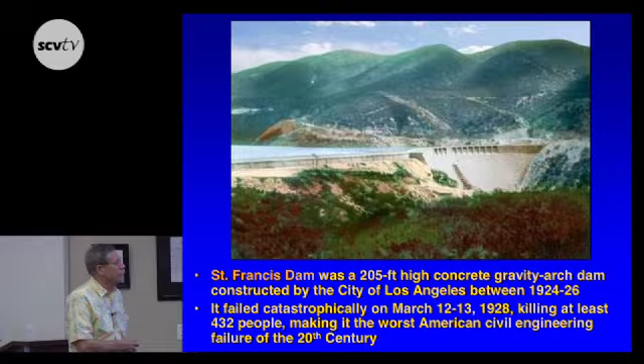The guy that built it, who headed up the water department for many, many years, was Big Bill Mulholland, who had left Northern Ireland at the tender age of 14 and made his way eventually to California in 1877. He took a job as a ditch tender, a Zanjero, for the Los Angeles Water Company, adjacent to the Los Angeles River, around 1879. He became the chief of that water company, succeeding Fred Eaton, when Fred Eaton became the city engineer in 1886. The company was bought out by the city in 1902.

And there were no records - the records were all in Mulholland's brain. So they got a board of public service commissioners, and they went down and sat with Mulholland for a couple of weeks, and he drew a map of the whole town and said, you got 5-inch lines here, 4-inch lines here, 2-inch lines there. He had it all in his memory.

He was the principal visionary of the first Los Angeles aqueduct, which was - I can't underscore what kind of precedent-setting project that was. It was the first time and only time in world history that a municipality built a water supply system ahead of its population. It almost always occurs the other way around - you wait till everybody's starving for water, then you have a referendum, then you go build something like the Croton Aqueduct the City of New York did in 1832. And they did it again in 1893, and again in 1917, and again in 1935. They just kept building the water infrastructure behind the burgeoning population. He solved all kinds of incredible problems to bring that project in on time and on budget - he was a born problem solver.

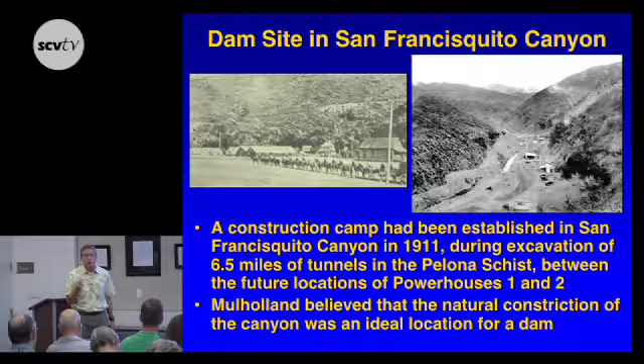Construction of the St. Francis Dam began in mid-1924. They built a cutoff wall, a little coffer dam, only 8 feet high because there's not much water in that channel in the middle of the summer.

That shows outlet number 1. You see outlet pipe number 1, which is two steps above the bottom step. That's going to figure real important later when we do the forensic analysis.

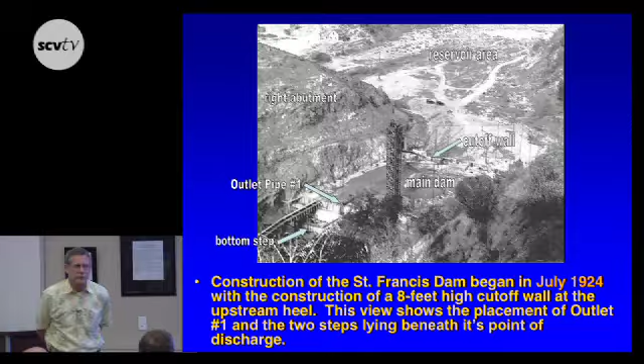When you do forensic analyses, what you go after are photographs. Photographs are the most reliable documentary source out there, until we got all the computer ways of altering photographs that we have now. But in the old days, photographs were better than people's memories. You never have too many photographs, especially aerial photographs.

And so they started placing concrete. In the 1920s, there was a lot of problem with the ways they placed mass concrete. You see here a bunch of billowy pillows. They weren't trying to set the concrete into casements so that you can have contraction joints like you see in Hoover Dam, where they were typically 50 by 50 casements, and you'd only pour 1 foot of concrete at a time. What they did here, they brought the concrete down in troughs and just pushed it out there all over the place, and you had little ponds that would form on top, and you'd get that real soupy laitance layer, which becomes a low strength layer. It's high water cement ratio, very, very porous, and not a good thing for dams.

But all the dams built up near Santa Barbara, up the coast, down here in Southern California, up through about 1930, have that problem. And a lot of them, most of them, have been retrofitted since they were built.

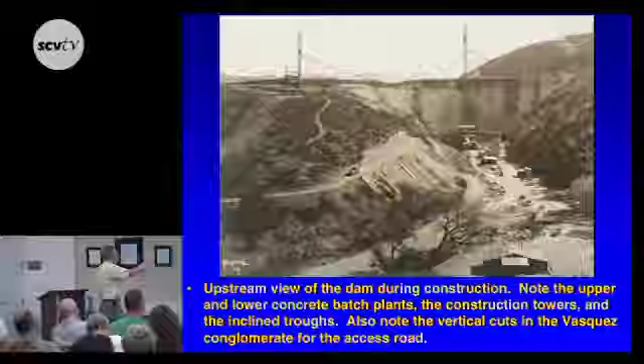They had minimal excavation of the abutments. The left abutment was in Pelona schist, right along foliation planes, which are weakness planes in the mica. You can see it dipping down about 35 degrees. They're only excavating about 7 to 15 feet into that material, which isn't very deep for a 205-foot high dam, but that's what they did on the left abutment. On the right abutment, they were in conglomerate, and they put a trench in there with a steam shovel.

This is the view looking upstream during construction. Those big towers are what they lifted the concrete from the batch plant at the bottom - right at the base of the dam was a concrete batch plant. They then would lift the concrete up, and then have it go down these troughs, just like the troughs you see on the back of ready mix trucks, except these things are 400 or 500 feet long, a couple hundred feet long.

And what happened is you get aggregate segregation when you put concrete down a trough. It's the same problem they had with Gibraltar Dam, up north of Santa Barbara, built in 1925. So they weren't doing concrete placement the same way 10 years later. That was something they didn't understand.

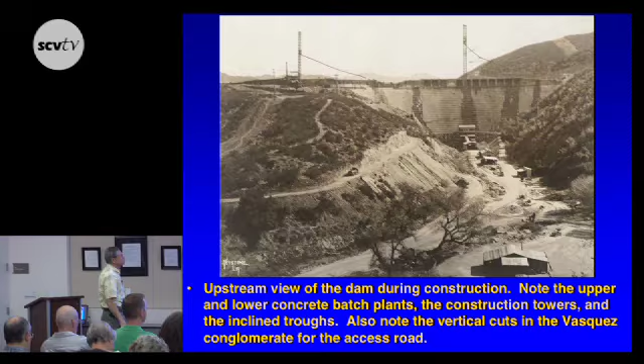What was good about this dam is that it had a step face, and each one of those steps had a different width depending on its elevation. The steps varied from 5.5 feet down at the lowest elevations of the dam, and they narrowed to as much as 1.45 feet up near the top of the dam. That figured very prominently in the forensic assessments they did later to tell where the blocks came from in the dam, up to a mile downstream.

It was completed in May 1926, so in 22 months, 130,000 cubic yards of concrete, with 11 little spillway panels you see up there with the sky just peeking through them. They were only 18 inches high. We've never, ever tried to do a stunt like that today - 18 inches high means any tree that comes down there is going to get caught in it. So that's not a lot of freeboard.

But that's what they did because they didn't expect this thing to ever be spilling, because it's an artificial dam - it's an aqueduct dam. It's designed to catch water from an aqueduct. It's way larger a dam than you'd ever build in San Francisquito Canyon for the amount of water you expect to collect there, because it's pretty dry in the Sierra Pelona.

It had 5 30-inch diameter outlet pipes with a maximum capacity of 1,184 cubic feet per second if you had a full reservoir right to the spillway slits. If all 5 of those outlets had been opened at noon on Monday, March 12th, when they were out there inspecting the dam, Mulholland and his chief assistant Harvey Van Norman, they would have dropped the reservoir by only 1 2/3 feet in the next 12 hours.

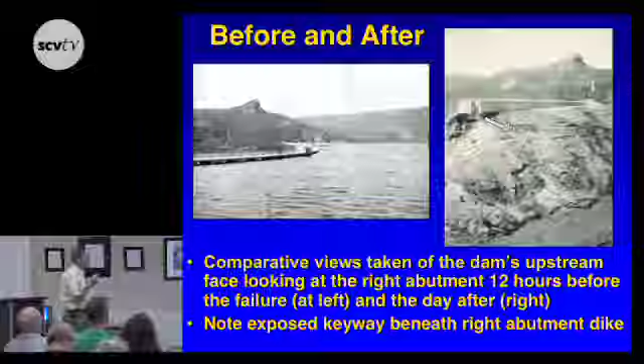Play it safe, drain it fast as you can. The reservoir was brought up to spillway level for the first time, almost 2 years into its operation, on Wednesday, March 7th, 1928. All the city reservoirs were full by the following Sunday, March 11th.

And that's real important in the story, very important. So all the city's reservoirs were topped out, they could take no more water, so they began dumping water on the Drinkwater Canyon bypass. Well, the first time they'd ever used it was the day the dam failed. So all this water coming down San Francisquito Creek that hadn't been coming down the creek the day of the failure - a lot of local residents recall that and say the dam is leaking. No, the aqueduct was dumping because they couldn't store any more water, and it was cool and clammy with a low ceiling, so people weren't using a lot of water.

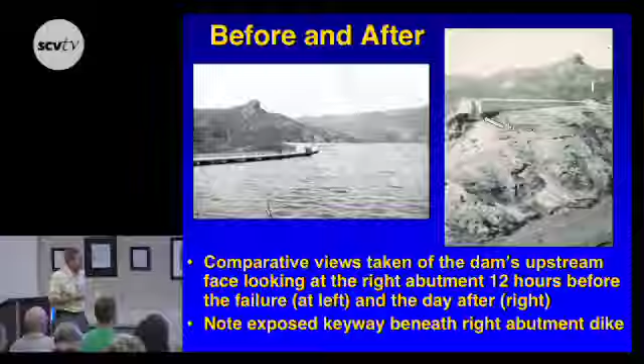Dam keeper Tony Harnischweger called Mulholland that morning to report dirty water coming from the right abutment area. There's always water leaking out of dams, and there's always water leaking on the abutments of dams and underneath dams. That morning they had about 2 cubic feet per second spillage coming over the spillway panels, darkening the downstream face.

That wasn't what Harnischweger called them about. Harnischweger's calling about water coming out of the upper end over in the dike section and coming down, and it's muddy. And when a dam engineer gets told he has muddy water, that means you could have hydraulic piping, like underneath a levee. And you get very excited. You don't want to have muddy water. Clear water is fine, muddy water, bad juju. Don't want that. So Mulholland races out there. He doesn't drive - he has a chauffeur-driven limousine that takes him and Harvey Van Norman out there.

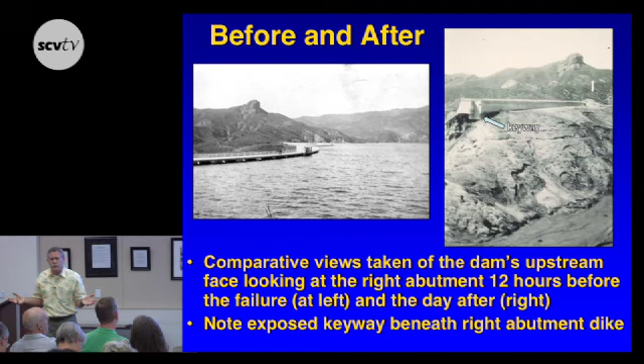When they get out there - this is a real unusual case. You can't find another dam failure where the chief engineer and the assistant chief engineer are there looking at it 12 hours before the failure, and what do they do? They bless it. It's like, everything's fine, see you later alligator. Well, that's what they did.

They came up there and looked at it, and he said, I don't see any problem, we got high water. And he found out that the leak - what happened is the leak was coming through as clear water, and then it came down a construction road they were just putting in, and it picked up the dirt when it went over the uncompacted fill on the shoulder of the road, and that's how it got muddy. So that was a reasonable conclusion to draw. I can't fault him on that one. I probably would have said the same thing.

It went out in the middle of the night. And the first 62 victims were employees and their families of the Department of Water and Power, who lived just 1 3/8 miles downstream. Lots and lots of dead children.

I'm very zealous about flood safety, and a lot of people call me up. I talk to the media all the time, and they say, why are you so zealous? So-and-so over at this university is not nearly as concerned as you are. And I said, the difference between him and me is I pick the dead babies out of the trees. You do that, you have PTSD. You don't get that out of your...

There's a little boy about the same age as my little boy, never identified. Looks like a Latino boy down in Oxnard. Innocent victims of flooding - that's what we should never forget. You can't do things too safe when there are things that can kill children.

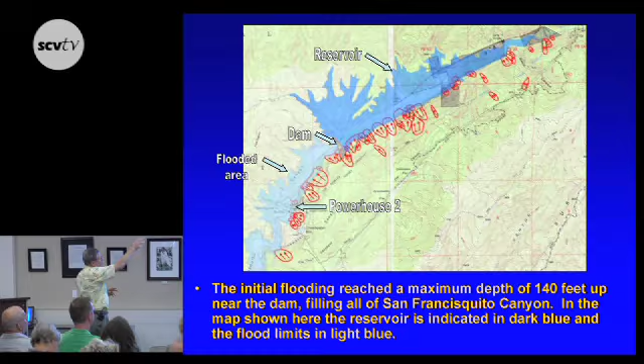The dark blue is the lake before the flood. The light blue is the inundated area going downstream. You can see all the buildings right there - that was the houses across from Powerhouse 2 that all got taken out. Only 3 survivors there: Lillian Curtis Eilers and her son Danny, and Ray Rising, out of the 70-some people that were there.

So there are 64 victims at Powerhouse 2, and you can see the penstocks come down where Powerhouse 2 had been. The aqueduct was completed in 1913. Powerhouse 2 was completed in 1920.

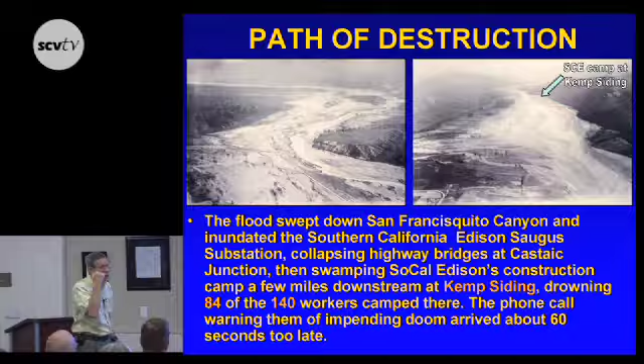It then came down and met the Santa Clara River, spread considerably, took out all of the Castaic area, killed a lot of families there, and then went down to Kemp Siding, killing 84 of the 140 Southern Cal Edison workers in a workman's camp. That was so close—they were calling them on the phone, and the night watchman answered, but before they could tell them to get everybody out, the phone went dead.

They were just seconds too late to save the people there. It finally reached the Pacific Ocean at Montalvo around 5:30 a.m. By that time, it's only moving 5 miles an hour, but it's 2 miles wide.

You wouldn't think that would be capable of knocking bridges down, but it knocked down the Coast Highway and the Southern Pacific Main Line, both taken out right at the coast. That's a lot of water to suddenly put in, and what happens is you get back eddy scour on the downstream side of the pilings, of the bents.

The Santa Clara River is just pure sand, so if you put a lot of load on it, it's going to eat down. If you have 5 feet going up, you're going to have about 15 feet of scour going down. That was the problem—it was a scour problem.

It's a 52-mile path when you smooth it, 54 miles to the ocean—2 miles shorter because the flood is cutting off the corners.

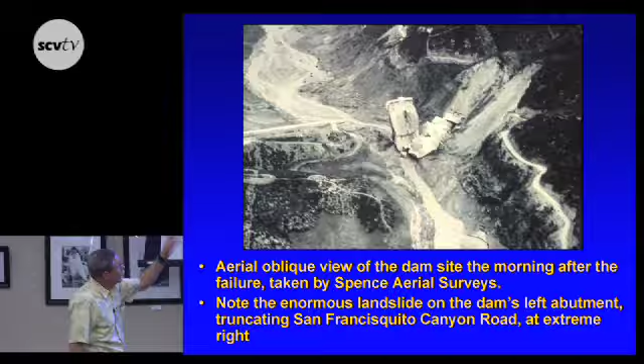The left abutment had a very large landslide, and that's the surprising thing. You see it truncated the road, taking out about a quarter mile of the San Francisquito Canyon Road. Mulholland and his assistant Harvey Van Norman had a hard time even getting there because the road was taken out by other landslides.

When you drain a reservoir very, very rapidly, you get something called a rapid drawdown condition. This is what kills levees. If you let the water go down real fast, you get an imbalance because the banks are saturated, so the banks just slump into the reservoir.

So they had to hike in, and the chauffeur had to dig steps for Mulholland, who's an old man, to get in there. He's 73 years old when this happens.

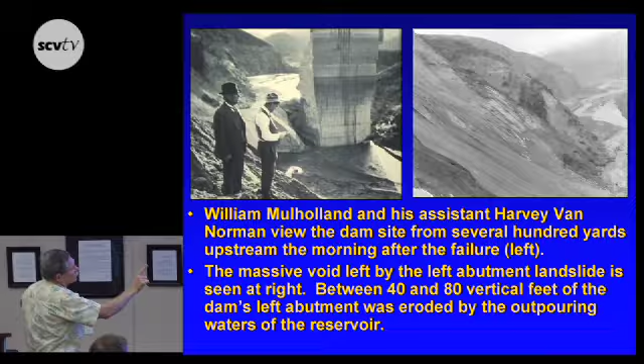So between 40 and 80 vertical feet of the left abutment was eroded. When you look over there and see where the landslide is on the right, the dam was built 40 to 80 feet above that surface. It was an enormous amount of material eroded out of there.

Governor Young appointed a 6-man panel to investigate the failure, including 2 geologists. They made a single visit to the site on Tuesday, March 20th, and depended entirely on information collected by others. We can see the guy making a plane table survey over there, which was the survey given to those investigators, and the geologists were very much impressed with this fault.

You see right there, it looks like an interstate highway, that white line—the white contact with the gray is the fault. Here it is in black and white, orange over silver. They saw that fault and thought, who would be dumb enough to build a dam on a fault? That's what all my geology classes said at Cal Poly—they took us out there and said, this is what happens with a dumb engineer who doesn't get geology and builds a dam on a fault.

Now, before you think Bill Mulholland's too dumb, he's the first civil engineer in the United States to recognize faults and the risk they pose to water supply infrastructure. He wrote a whole paper about it in the Bulletin of the Seismological Society of America in 1918, and gave a keynote presentation at their annual meeting in Los Angeles that year.

He tells about intercepting the San Andreas Fault 400 feet below Lake Elizabeth when putting in the aqueduct. He maps the zone, about 300 feet wide. That's why he wants to build a dam and reservoir south of the fault to hold a one-year supply of water, because if that fault moves again like it did in the January 1857 Fort Tejon earthquake, it's going to take a year to fix that tunnel. He was 75 years ahead of his time on that one.

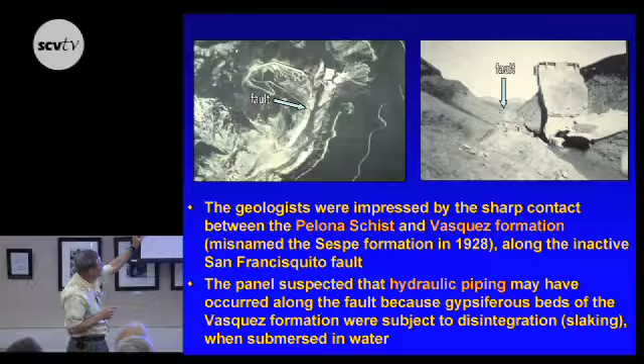Those are never good for hydraulic piping—materials subject to hydraulic piping. So they took pieces of this conglomerate out, went into the coroner's inquest, put the conglomerate into beaker water, and it just spontaneously disintegrated. They said, 'Would you build a dam on that?' Well, the thing is, the dam weighs a lot. You put the dam on the material—it's not like the material can just disappear and come out of there.

It has all to do with something we call restraint in solid mechanics. If it's restrained, the bad stuff can't hurt you. It's only when it's free to move somewhere that it can hurt you. So that's what they concluded at the time, and these guys got their report out first, so that's the report that's in all the textbooks to this day. That's how the St. Francis Dam failed.

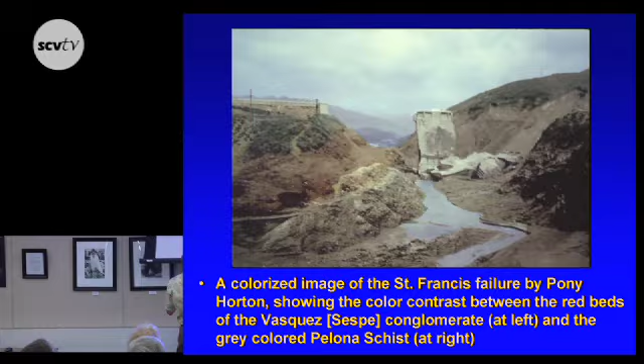This is a colorized image that actually shows the fault. You can see that silvery material is the Pelona schist. The orange material is the Vasquez conglomerate.

Now, when you're on any kind of forensic panel, and I do lots of these still right now—I have the Oso landslide in Washington I'm doing right now. It killed 43 people last year. I'm chairing that commission. You are always going to be taken hostage by things that are graphic. And that's good, you've got to take them in, but you can't let them over-prejudice you about what's going on.

Going out to the site one time, not making any independent measurements—these are all things you should not be doing in a forensic investigation. And you want to get people of different backgrounds, different experiences, as I'm going to talk about later. It's very important.

All right, so here's the map that they were given, that the State Commission was given. Horace Wildy, who was a Division of Highways surveyor, put it together, and he shows the dam, and he shows block 16 way downstream of 11, 12, 13, 14, and 15. Block 16 came out of the right abutment side, right above the fault. So it's the block right up there near the fault.

So that's part of why, again, that was circumstantial evidence. The panel said, well, that block went a half mile downstream, the other large blocks only went a quarter mile downstream, so it must have failed there first. They didn't have anybody on the panel, and they didn't have the expertise in those days with supercritical flow. Concepts of channel hydraulics hadn't been invented yet.

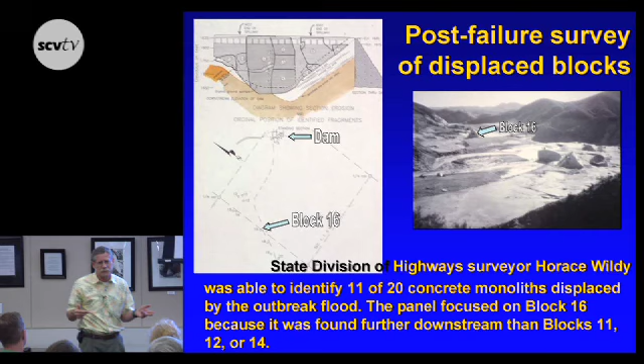So they were way, way off on the peak flow estimate. They estimated 400,000 CFS. When we did the reanalysis in the early '90s, we got 1.7 million. So you can see that's the kind of difference—we were off by a lot.

Now, the other thing was a missing section. In the original state report, the yellow area was the area they hadn't identified any blocks coming from. The white area underneath the left abutment is all the material eroded away by the outpouring floodwaters, and all of that is on the left abutment, not the right. It's like, do we have eyes? They did lose material on the right abutment too, but nowhere near as much as was taken out on the left abutment—a big, big hole under the dam taken out on the left abutment. So that was the missing section.

They fixed the blame and issued their report 5 days later. The team that gets their report out first is the team that makes it into all the newspapers. And after that, the story gets stale.

Because that's what happened, that's the book that was put out, that's the story everybody tells.

One of the shortcomings of Wildy's plane table map was that it did not include the relative elevations of these dam blocks. Blocks 12 and 14 from the base of the left abutment are actually located 26 feet higher than block 16 way down there. Block 11 may have helped form a dam with blocks 12 and 13 that deflected subsequent flows off to the left, where block 16 was found further downstream.

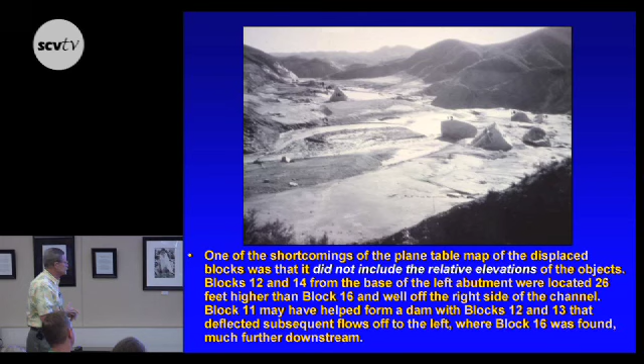If we go back, Charles Outland was a native of Santa Paula. He was a senior in high school, Santa Paula High School, when this flood came through his town and devastated it. He became an investigative journalist of sorts, a rancher by trade, and he did some great forensic work. So we don't have to go to college to get knowledge to do great forensics.

What we got to do is just be careful and not be over-prejudiced. You know, collect all the information and look at it. And he looked at this construction photograph and said...

There's the lower outlet pipe number 1, and I count 1, 2 steps below that, and that's all. He points this out in his book. First edition of his book comes out in 1963, second edition 1973.

When you look at that, what that tells you is this is the drawing that they gave to the state commission and said, that's the cross-section of the dam. Near as I can tell, all the part in yellow was never built. That was phony, that was not an accurate representation.

You look at all the photographs, Outland's right. And that toe he shows, which is about 10 feet wide, I put in there in red. So if you look at where the outlet pipe was, that's what they actually built.

When I got into the Bureau of Waterworks and Supply design files, there's the original design for the dam, showing a chopped toe very clearly. It did not flare out like it should have. It was a chopped toe, and they even put a shear key in.

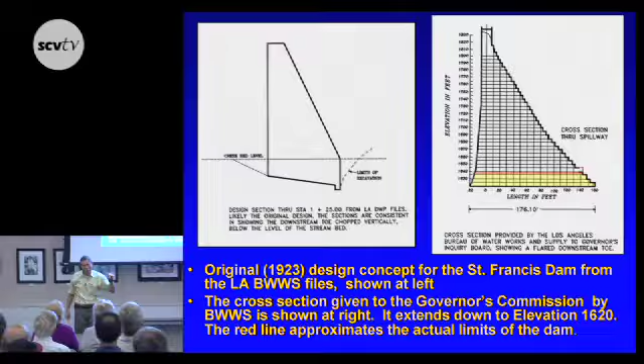The worst possible place you could put a shear key in is the downstream toe. You want that shear key at the upstream toe, not at the downstream toe. But that's how they showed it.

Now, also when you look at all the photographs, you see they didn't have the batter. There's a shift in batter right there, but they didn't have the bigger shifting batter down here to keep the toe out of tension. So that wasn't an accurate portrayal either.

Could you explain batter, please?

Batter is, let's go back.

And was this knowledge known at the time, or is it subsequent? Would be about battering. Well, the toe, you said, or not the toe, but the...

Well, it was a matter of it was good practice if you were at the top of the league in the Bureau of Reclamation, you would have known about that kind of stuff. But these weren't unusual kinds of things for the early 1920s, because you didn't have a lot of dams out there. Elephant Butte was the best example you had out there. There was a Bureau of Reclamation dam completed in 1915 on the Rio Grande.

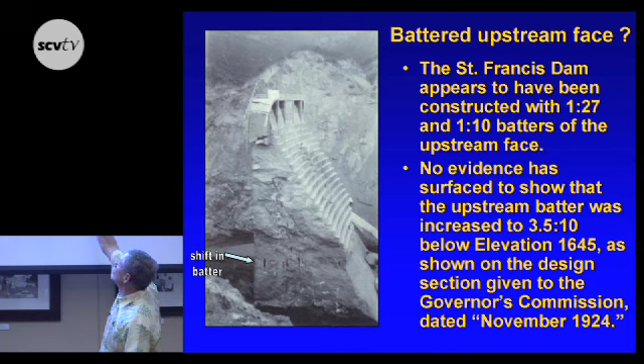Batter is the part that is away from vertical. So the higher my dam, I have to keep the upstream heel out of tension when the water load gets all the way up the top of the dam. So what I do to help that is I batter the back of the dam backward to help keep that out of tension, so when this thing starts tilting and moving in cantilever action, that doesn't get a crack opening up. And that's exactly what did happen to the St. Francis Dam. It had a huge crack that opened up the upstream heel.

We'll see that in a few minutes. There were also political promises that Mulholland made to the Board of Public Service Commissioners, where he said he wanted to store an entire year's supply of water. He said that in June of 1922. The problem was, every year, the city's consumption was going up markedly. So he changed the volume of the reservoir and upped it 2 years in a row.

So he raised the dam 20 feet to get that additional storage, but he did not increase the base width at the same time. So the Stevens stage recorder measures how much the reservoir goes up and down.

Of course, you have waves on the reservoir, so you can't just put a cork on the surface. What you do is put a 12-inch diameter stilling well all the way down the base of the dam, with a 1-inch hole in the bottom. The water pressure is faithfully recorded inside that stilling well by a mechanical device on top of the dam, which filters out the wave action.

You would be going up and down all the time, but you're getting the mean hydraulic pressure against the dam. That was invented by a guy named John Stevens up in the state of Washington, and they're still used all over.

They had to wind a device once a week with a brass key, and then a pencil mechanism measured where the stage level was. You can see it starts to drop off about 3.5 hours before the dam fails, then it goes down very suddenly.

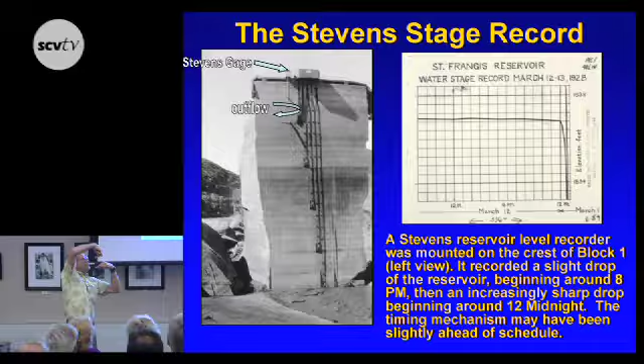When you look at where the gauge is broken up there, it's broken to the left, suggesting the outflow is to the left, not to the right. That's an interesting piece of physical evidence.

Then Carl Grunsky comes down from San Francisco. He works for the Santa Clarita Ranch Owners Association. They'd hired him before to critique the site because it was storing all the waters of San Francisquito Creek, which recharged the Santa Clara River. He won that particular litigation against Mulholland.

He came down, and at the upstream heel, he finds the gauge attendant's ladder crunched inside a huge tension crack at the base of the dam.

But that explains the gauge dropping 3.25 inches over the previous 3.5 hours. It's just the tilting - it tilted half a degree. And that's why it looked like the water level's going down.

The water wasn't getting down to Powerhouse 2. They didn't notice anything down there. If that was water escaping, they would have had a very significant flow downstream, more than 400 cubic feet per second.

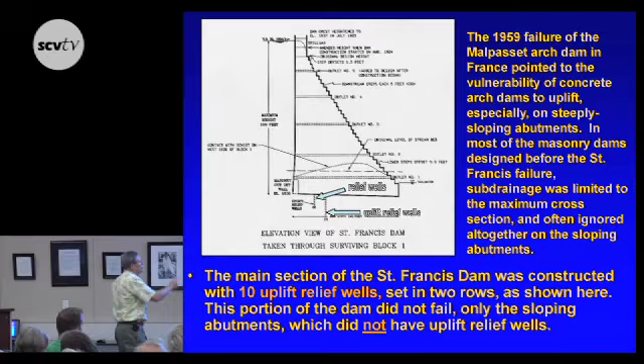Okay, the main section of St. Francis Dam was built with 10 uplift relief wells. Uplift relief wells are just dry wells you put under the dam so that when the reservoir comes up and water starts seeping underneath, you drain that off and decant it to reduce the hydraulic uplift.

The hydraulic uplift is equal to the reservoir depth. So if I have a 150-pound chunk of concrete and I put it in water, it weighs 150 minus 62.4 pounds per cubic foot - that's the weight of water it's displaced.

So they didn't understand uplift as well before this failure as they did afterwards - it's something you really want to do something about. What he did here was very typical of the early and mid-20s: he put in 10 uplift relief wells beneath the main section of the dam where you're going to have the greatest loads. That was a reasonable precaution - one of the good things they did do.

They didn't have the uplift relief wells under the sloping abutments, but that was pretty common up until 1959 when Malpasset failed.

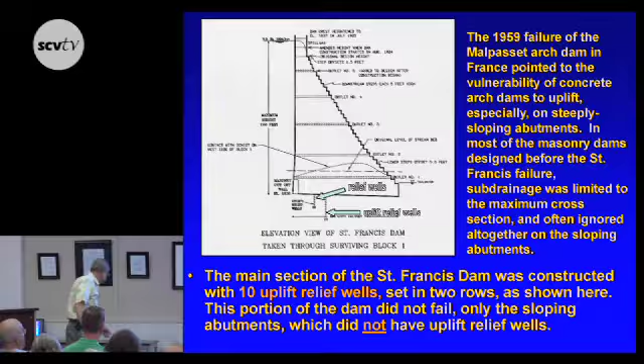So he probably reduced it by 50%, but he still got a crack in the upstream heel, which moved R sub T, the resultant thrust, outside the toe of the dam. That's why the big, huge crack is back there. And that was a 3.67-inch drop of the reservoir recorded 40 minutes before the failure, which explains why we see the record we do on the Stevens gauge.

When he was testifying at the coroner's inquest, he cited several books: Smith's Construction of Masonry Dams, and Wegman's Design and Construction of Dams, 2 of the 3. I went and got those books and looked at the design examples, and I could see they had copied those. That's not hard to tell. You can actually see the difference between a dry dam and one designed for uplift. That's why they put the uplift relief wells in.

Here it's actually showing, in one of those books, this is from Folwell's Water Supply Engineering, where the resultant thrust would be if it's absolutely dry, and where the resultant thrust would be if it's loaded with water all the way to the top.

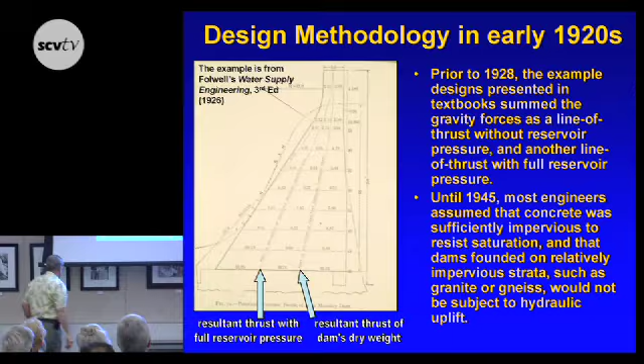I can't go farther this way than that point. That's the middle third. If it goes farther over, you get cantilever instability and tension back here at the heel. So you'd flare this thing out more, and that was the problem with adding 20 feet to the top without adding any to the base. Cantilever action is just that—it's a cantilever, and you're pushing it over. You're trying to keep the resultant in the middle third, which is required for stability in cantilever action.

When we actually ran it on a computer, we learned the dam became unstable and began overturning when the reservoir rose to within 7 feet of the spillway crest. So adding the extra 20 feet was very important, especially the last 10 feet, because it had the chopped toe.

Arching—they did not design for arching at that time, but they knew it was a good thing to do, so that was good practice. The fundamental theory for figuring arch stresses was developed in the mid-20s on a big multidisciplinary research project in California, but the final reports didn't come out until this dam was built, in 1926.

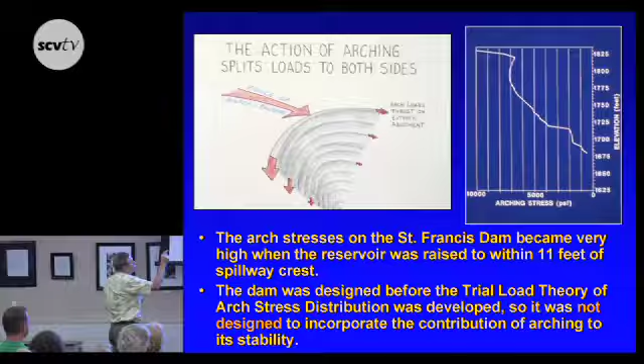If we look at the arching loads using finite element modeling, we find that when the water got up to 11 feet of crest, the arch loads suddenly got very, very high. So it was not designed to incorporate the contribution of arching, but that would have been a problem when the water got that high.

These are the reservoir stage curves for the two years of operation, 1926 versus 1927, and then almost 3 months into 1928. We're looking at the elevation of the reservoir in feet versus time, January through December. In 1927, they got it to within 4 feet of the crest for about 5 days, very close to the load that failed it. It got to spillway crest 7 days before the failure in 1928.

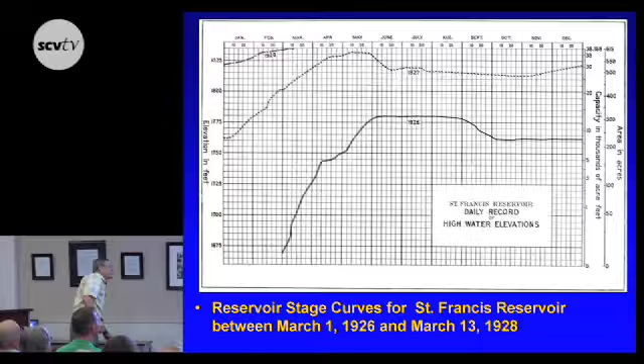So you ask yourself, what was so different between 1927 and '28? Those aren't very much different—4 feet, 4 feet 3 inches, 4 feet 6 difference. Not much. That bothered me for a long time. I didn't get that one figured out until this last year.

In 1926, the reservoir was filled just 110 feet up to elevation 1780. There's what it looked like, here's what the loading would have looked like. It shouldn't have had much problem taking that kind of load. That's the kind of load, by the way, that Mulholland Dam has on it right now, up in the Hollywood Hills—it only has about that much load on it.

The lake's more than 2/3 drawn down from its max capacity. January 5 to May 27, it was raised another 52 feet up to elevation 1832, with spillway at 1835—just 3 feet from the spillway—held there for 3 weeks, then drawn down to 1813 to 1819 until November 10. So why didn't the dam fail when you're that high? You're overstressing it for cantilever and for arching.

Now here's the important thing: during the first year of operation, several large tension cracks formed transverse to the dam's axis. These were likely in response to the cement's heat of hydration. When you have a lot of mass concrete, a chemical reaction occurs that produces heat, and that's why you get tension cracks and shrinkage cracks—about 0.5% shrinkage. So we build those joints into dams, starting with Elephant Butte in 1915. But not everybody was doing that, though a few people were. Then you have to grout those.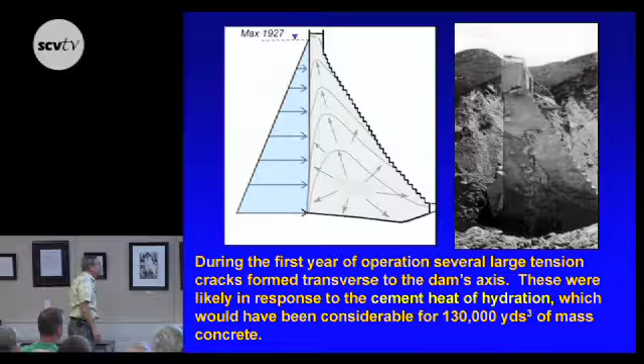It didn't go just straight through the dam. It went part way and then it jumped over and went part way again. So it wasn't just an open canal all the way through, but it was enough he's getting significant water flowing through it. So if we look at where the cracks were, the 4 largest ones are shown in the drawing above. You can see that one on each side of Block 1, those were pre-existing shrinkage cracks that were in the dam. And then there were 2 real prominent angular ones at 3 and at 4 on both abutments, which is what you'd expect for not doing grouted contraction joints.

This is some of the contraction joints after the failure that were photographed in the wing dike section. They're about 3/4 of an inch wide, and these go all the way through because it's only a 20-foot wide section. This is where the water was squirting through that Tony Harnischfeger called Mulholland about, through the wing dike section. But you didn't have a lot of head there, so you didn't have anywhere near as much water coming through as you would have with the same aperture-sized crack in the main dam.

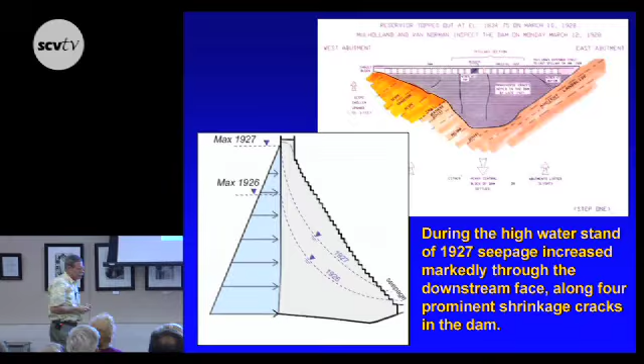So what did he do? He saw that in 1927, he was getting visible seepage, especially on the base of the left abutment of the main dam. And Mulholland, being a skinflint, and being that water's worth money in Los Angeles, makes a big mistake, a big technical error. He didn't consult anybody probably. He decides to caulk the downstream face of those major cracks with oakum and to inject grout pipes and try to grout the joints.

You don't do that on the downstream face of a dam. You don't drive the wrong way on an interstate, and you don't do this. If you're going to seal those cracks, you've got to seal them on the upstream side. Because if you seal them on the downstream face, you're going to get full hydrostatic force going into the interior of the dam, and it can't get out, so it's going to build up. You either give - pore pressure is not about the volume of water, it's about the pressure. It only takes - the crack can be as thin as a piece of paper, and it can cause a great dam to fail. So pore pressure is your enemy because it reduces friction and dead weight.

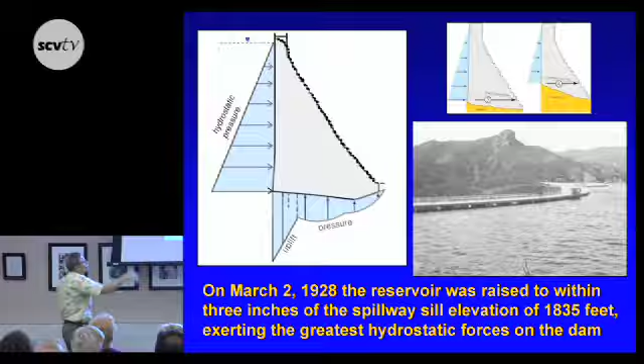And so that's what he did. The reservoir was raised within 3 inches of the spillway on March 2nd. I'm looking at different spots of the dam on the abutments as well as the main section. The abutments don't have any uplift relief pressure, so they're going to get full reservoir uplift on all of them.

If we go and look at where the seepage was, when he sealed it on the downstream face - that heavy black line there - you can actually see the crack when you look at the post-failure pictures. You'll see these dark areas that go up and then disappear. That whole dark area was an area that had water in it, which caused discoloring of the concrete. So you can see it didn't just go through cleanly. It probably came over, stepped over, and then went through the upstream face. You can see it here as well, all the water coming out, dripping out after the failure. The concrete wasn't nearly as impervious as everyone had assumed.

This is the back of block 5 after the failure, showing the back of this crack, and that's the oakum, that black stuff in there. That was a big crack - there's what the back of it looked like. It was huge. These ripples you see on the concrete are where they placed the concrete against the schist, so you're seeing the imprint of the schist structure, the foliation planes, just like a plaster cast of somebody's footprint.

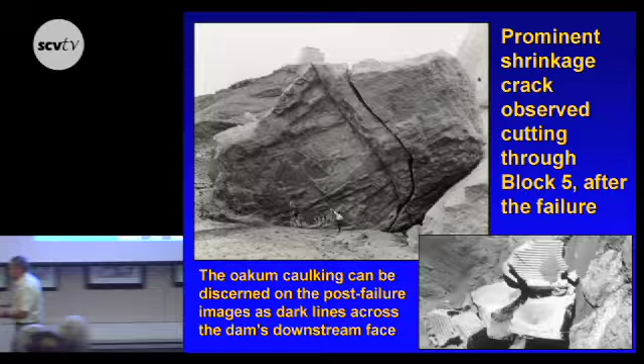The 70 kV power line went down at 11:57.5 p.m. The Governor's Commission missed this because they got out there 7 days later. If you look at all the earliest pictures taken, you can actually see the downed lines in front of the dam - you see there on the left. And you look over here on the right, you can see the power line is up well above the high water line.

If you look at where the power poles were on the left abutment side, they're well above the dam level, actually almost 100 feet above the dam level. So you can't escape the conclusion - we know that power line went out at 11:57.5 p.m. We got that in all the SCE Saugus substation records. That's when the slide moved. That's how the line got taken down. The left abutment slide happened first, not last. That's a pretty easy one to sort out.

So the east abutment landslide involved about 700,000 cubic yards of schist. It was removed in a very short period of time. The slide scar extended 130 feet above the reservoir water surface.

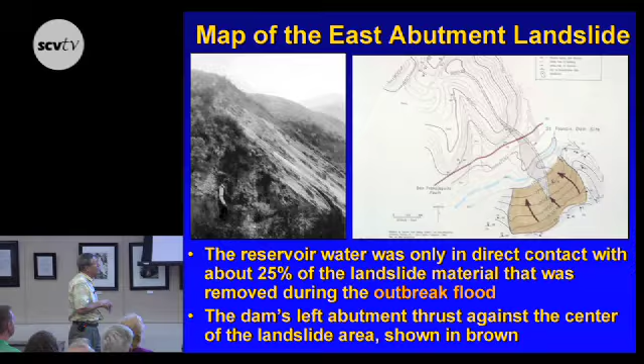We went out and mapped that landslide with a group from Cal Poly using plane table surveying in 1980. Then I got the city's engineering drawings and put the dam back in using one of the benchmarks they had put out there on the slopes. We were able to survey it in. There you can see the gray outline of the dam, and the brown is the landslide.

Now what's bothersome is only a quarter of the landslide had reservoir water against it. So how did this whole thing move if only a quarter did? The red line is the fault over on the right abutment. Here's what it looked like after the failure, about a 35-degree slope coming right down the foliation planes, because they're made of mica schist, very slippery stuff.

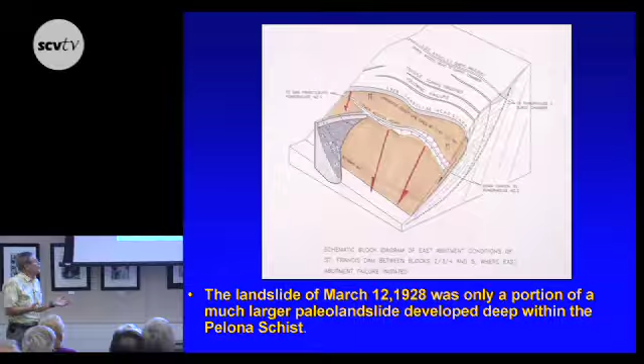Here's a block diagram looking at that slide. The slide that came out in 1928 is only a small sliver of a much larger landslide complex, an ancient bedrock slide. So it's a small piece of it that came out. You can see the power pole. There were two sets of power poles in the slide that got taken out with it, and that's why the wires were there on the downstream side of the dam.

Stanford geology professor Bailey Willis was one of the first, probably the first, cross-trained engineering geologist in the United States, and for many years president of the Seismological Society of America. He correctly deduced what was going on at the time, that the mass that was carried away was a small percentage of a much larger landslide feature, because he saw the B Highline Road had settled 9 feet, way up above the dam site, 180 feet above it. So the whole left abutment had moved.

Willis was persona non grata in Los Angeles throughout the 1920s, because in 1925 he had predicted that LA would have a huge earthquake after the earthquake in June of '25 in Santa Barbara. The Eastern establishment quit insuring and quit making loans to Los Angeles construction concerns. He became public enemy number one of the Chamber of Commerce.

So they went and got the geology professors at Caltech and asked them to write a refutation, and they wouldn't do it. They said no, he's actually right, he's playing it out. So they told them, well, you shut up, you quit talking to the press. If you talk to the press, bad things will happen. They shut up. They were muzzled.

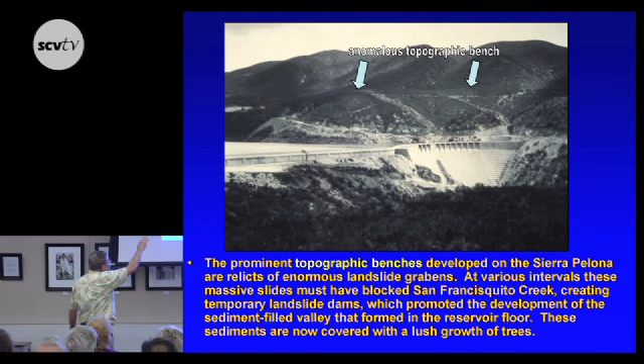When you look at the site—which I didn't, the first 20 years I was out there—I didn't see the big landslides. I didn't know about Willis's stuff. It was written up in Western Construction News, not a journal you read a lot. I looked over at the benches and just went, wow, look at that bench. It's like an aircraft carrier. You don't get flat benches like that in the mountains without a good geological reason.

Right, Larry? That's right, it's got to be a reason—it's a fault, it's a fold, a lithology change, rock type change, or it's a landslide. It's going to be one of those four, most likely. Site of an ancient Indian interstate highway or something? No, that ain't it—something's happened there to produce that kind of bench. That's the dam right there.

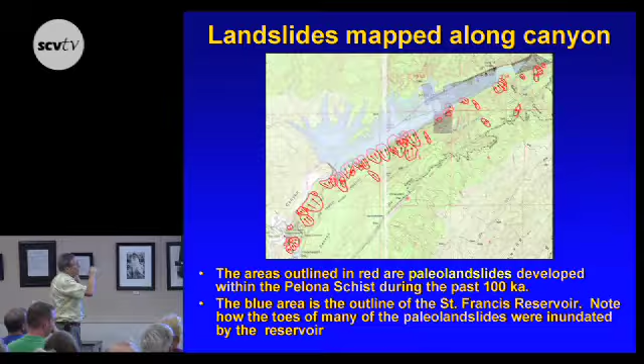All right, so we started mapping landslides, and lo and behold, they're all over the place—big, large, rotational slump slides that probably occurred during the last 100,000 years or so. And if we look at those, the dam site was an ancient landslide dam site.

That's why the canyon was so constricted and closed, and that's why it was such a favorable place to put a lake. The ancient landslide lake was much larger than the St. Francis Reservoir. It was a much bigger slide, probably about 350 feet high instead of 200 feet high. But that's why it made a real favorable place to put a dam.

It was a former dam site, a natural landslide dam site. The city didn't have to put out a report in 7 days. They sent people out there, Ralph Proctor, H.C. Gardett, and A.R. Arledge, and they made the best forensic, careful surveys of the displaced blocks. Yes, the city engineers did. And they put this out for their expert, Charles Lee, who they were using in the defense of their cases. I found it in the Lee collection at the University of California Water Resources Archives.

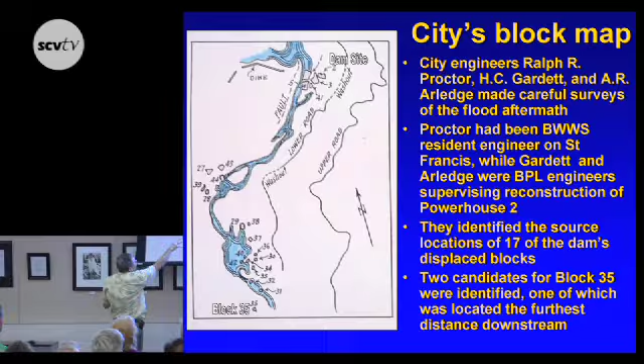And they identified the source locations of 17 of the blocks, many of them far downstream. They had 2 candidates for Block 35, both far downstream. Block 35 was the base of the missing section, it's the key block. And they identified block 32, the upper half of the missing section. There's block 35, the furthest one downstream that you can identify where it came from in the dam, the base of the left abutment, not over the fault on the right abutment.

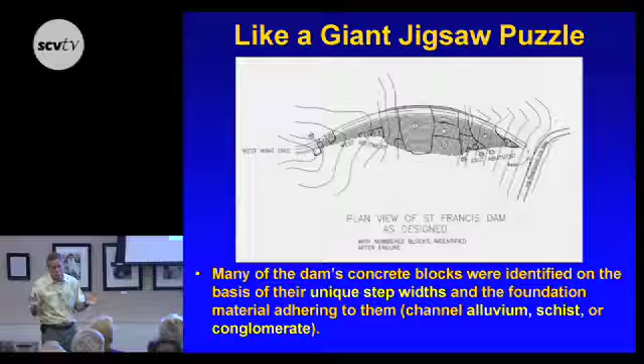So back, I remember AutoCAD 13 came out in 1991. I got so excited because now I could do three-dimensional puzzles, and I could start to put the blocks back together. This was the first paper I ever published, in 1992. It was all done with computer, all done with CAD work, and we were able to put the jigsaw puzzle back together.

And then I started working on the abutment, on the landslide, and I treated it just like a dam consultation that I would today. So I went up there in the mid-'80s with Mike Scullin, who was an engineering geologist down here, one of the deans of engineering geology. He lived in Moorpark, he'd put me up for free. We'd go out there on the weekends and just collect data and rattlesnakes.

There are so many rattlesnakes here. If you go out there, take an attorney with you. That professional courtesy, yeah, they don't bite you.

Key block theory. One of the new things that came out at Cal Berkeley in the mid to late '80s was key block theory from Shi Genhua and Richard Goodman, and I had introduced those two men to each other. So I was really keen on using this. It was very useful to us on assessments of existing arch dams and gravity dams for the Bureau of Reclamation. And I ended up identifying 3 different wedges in the left abutment at the base of the dam that were troubling. A lot of other ones weren't troubling. These 3 were, because even when you put the dead weight of the dam on top of them, they moved. They came out and they lifted the dam up.

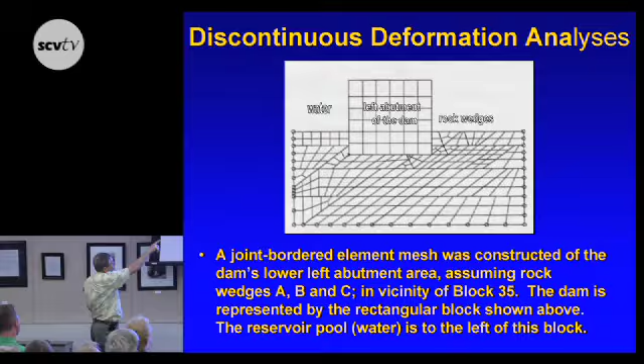So here's a discontinuous deformation analysis run where we're modeling the dam, the left abutment, lower left abutment, block 7. We got these rock wedges. We turn the water on and the wedges start coming out just downstream of block 35. That's interesting. Now, you don't stop there. So now I've got 2 failure modes, 4 failure modes, all saying the dam should have failed by that failure mode. So which one is it? Or which combination of the 4 is it? We didn't know. It was just getting more interesting.

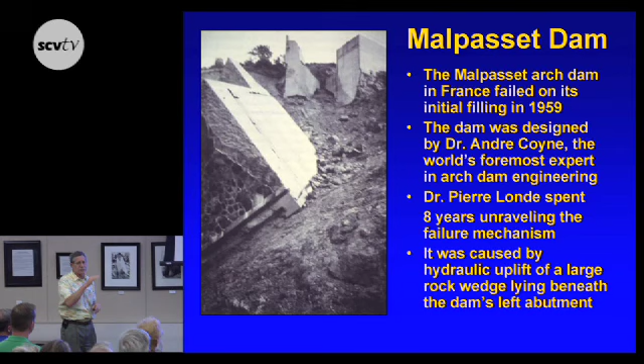Malpasset Dam had failed in 1959 at an identical failure mode, and the guy that designed it had a PhD, and he was the world's most famous arch dam engineer, Dr. Andre Coyne. It took him almost the entire decade of the 1960s working with a panel of experts to figure out why this dam failed on its first initial filling. It was uplift pressures, it was in the schists, and there was a fault. All common elements with St. Francis.

So we then went back and looked at the landslide and tried to model that and said, okay, let's go down there where we have wedge B coming out, and right by block 35, let's pull block 35 out and let the water shoot out. Because we had one eyewitness account from Luis Eller's husband that he felt a mist in the canyon, and the mist would travel down the canyon as a density current when you're spilling. That's a big issue with dams. And that's what woke him up, and then he heard the thing coming like a freight train.

So when we analyze that, sure enough, the whole thing comes down. What we learn is we develop really high pore pressures in here because the water can't get out. The water is basically caught in here like lithium grease, and it greases this whole thing, and the mountain just comes down on top of it. Guess what? It's 70 feet thick, the exact thickness we measured out there after the failure. Isn't that interesting? That's another failure mode.

Okay, dead fish in the sabotage theory. Lots of big spill pools, plunge pools, filled with dead fish, and they actually did autopsies of these and found they were killed by turbid outflow. So the fish gills were choked with

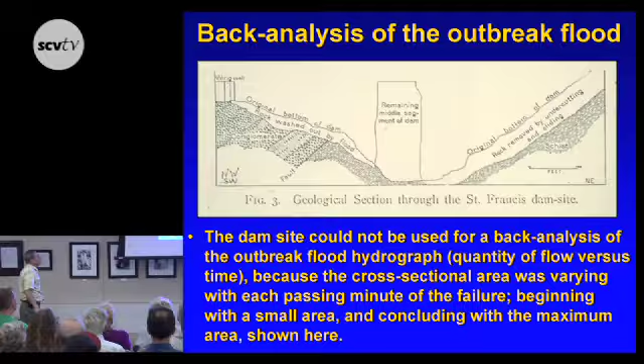So I had to go to another site, because here the cross-section changed every second, as more and more parts of the dam were falling down and being moved downstream. So you got to go downstream where you have some data. So I got the right slides now. We missed a lot of slides.

We know that the reservoir drained by 1:09 a.m. That's what the reservoir floor looked like the next morning, and we know that was 36,162 acre-feet of water. We knew that the power line went down at 11:57.5, and exactly 5 minutes later, Powerhouse 2 went offline, 7,300 and some feet downstream. So we know those things.

And then we go out there and use terrestrial photogrammetry to figure out where the high water lines and high water marks were. That's where I go out and take a stereo pair with the old photograph with one taken today, and then I can do different offsets to make different measurements at different distances from me. That's an old naval attaché spy trick.

So say you're in Shanghai harbor and you're across the harbor from some ship. You take a picture here, you look on a map to see how far away it is, then you calculate a half degree variance, and you step over here and take another picture of the same thing. You got a stereo pair for that distance. So you take groups of stereo pairs depending on what you're trying to measure.

For block 16, that's pretty close to me. For the high water line on the road over there, that's much farther from me. And then the dam's way out in the distance behind me. So that's how I get the water line depths from the old pictures.

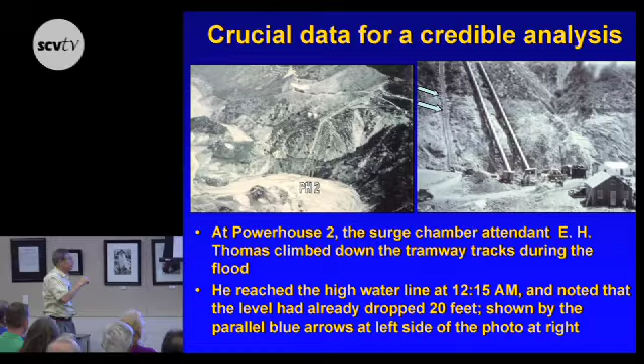Wow. I got some data, and I can put that into the computer program, and actually we got a very, very clean hydrograph the first time out. That's the only time that's ever happened to me. And here, it's a peak flow of 1.3 million CFS. Up at the dam, it was 1.7 million CFS by backing up the model to the dam site. So that's how we do it, to figure out what the outbreak flood was like. At the time, they estimated 400,000 for the maximum flow. They were way off on that.

How did such massive blocks of concrete, some weighing 10,000 tons, move half a mile downstream?

When we go out there, there's lots of evidence of hydraulic sorting. As I was talking to the group this morning, you get the real coarse stuff up near the dam, 12-inch stuff with blocks 11, 12, 13, 14. Further downstream you get silt and muddy material on top of the sands, and as the low flow goes out it also carries fine material further downstream.

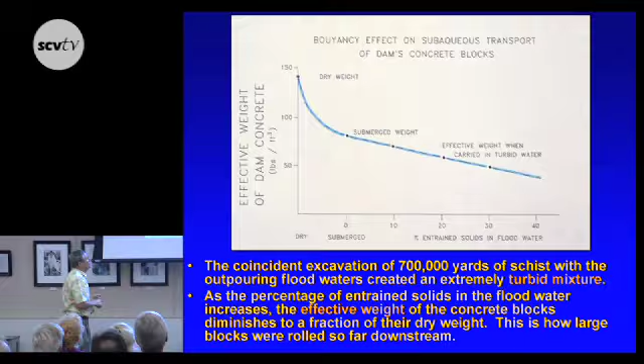This shows the effective weight of the dam's concrete depending on the percentage of entrained solids. The dry weight was 143 pounds per cubic foot, but it was never that heavy because when saturated you'd subtract 62.4, giving you the buoyant weight. Then if you had 10%, 20%, or 30% entrained solids, which is what they had, about 30% with the landslide, the effective weight of those blocks drops down to around 60 to 65.

That's how come they tumbled over and over and got so far downstream, because they were in a very turbid, muddy outflow. That was confirmed by the victims' bodies being filled with silt, their stomachs and esophagus as well.

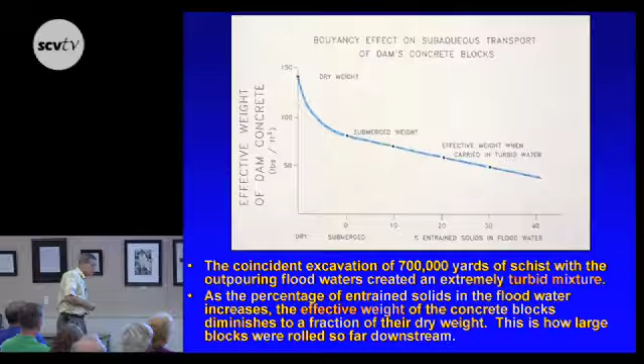Now, the other thing was when the Ray Sylvie family went by about 8:30 p.m., going up to Powerhouse 1 where he came on shift later that night, when he gets about 100 feet past the dam, notice the road. The road's about 7-8 feet above the dam crest, and it's 100% in cut, in rock, in bedrock. He hit a scarp, 12 inches high, and the car couldn't go any further. He had to get out and dig off the scarp.

When I first read that in the second volume, which Wendy Larson kindly found and sent to me, Wendy Cleaves over here years ago, that's one of my most treasured possessions, the 1973 version of Outland. I find this story and I just come off my seat. Twelve inches? That means the whole mountain moved 12 inches next to a concrete dam, 100 feet away. That's not good, that's like driving the wrong way on the interstate. Something's going on there, some big movements, big adjustments.

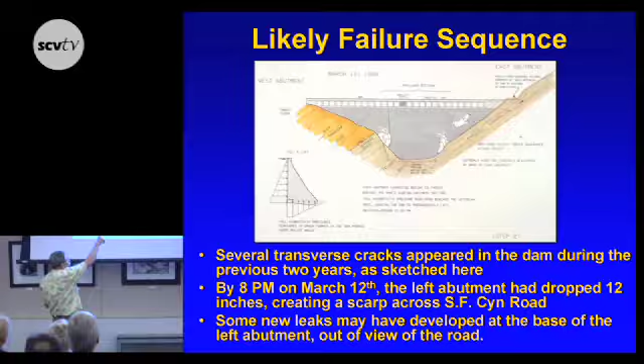So this is the likely failure sequence that developed. Something's going on down there near block 35. We got the mountain starting to move. We know the dam has been tilting for the last 3 hours in cantilever action, and things start coming apart.

And 45 minutes before the failure, somebody goes by the dam and sees a light on down at the base of the dam. There's no lights on the dam. Somebody's down there with a flashlight or a lantern looking at something, probably Tony Harnischfeger, probably with his wife Leona Johnson. We don't know—that's why we'd like to find the Leona Johnson file. She's found allegedly fully clothed, wedged between two blocks near the base of the structure. That's a fantastic story, I hope we can corroborate it.

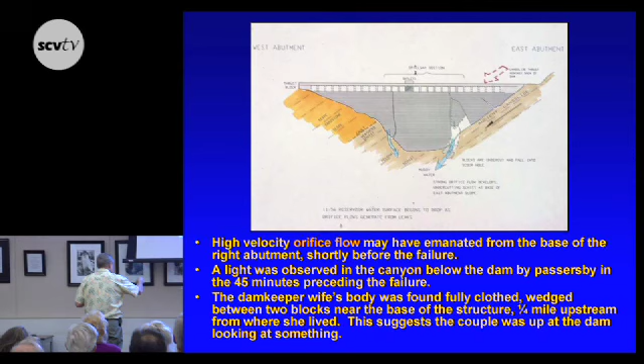Bodies of people living a quarter-mile downstream of a gigantic flood don't usually get found upstream of where they were sleeping. That's like me flying up to 30,000 feet right now just off a fart or something—that just doesn't happen, okay? You're not going to go that high. So you can't go upstream against a huge 1.7 million CFS flow. It's hard to believe her body could even have been preserved up in that area, given the forces we're talking about. But that's the story that's been passed down, and I'm trying to get that one nailed down before I write the book.

So I have an east abutment landslide at the beginning of the failure sequence. I didn't come up with that, Charles Outland did—I just drew it first. He came up with the idea, and when I looked at it, that's exactly what had to happen because of all the chatter marks across blocks 2, 3, 4, and block 1, which you're going to see in a minute.

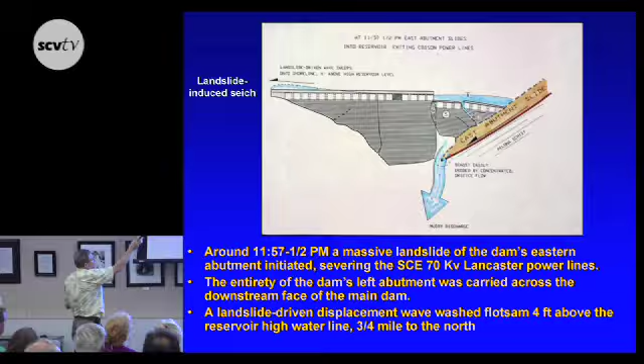So this big slide comes down and weighs 10 times more than the dam weighs—it doesn't have any trouble moving the dam around. There's a seiche wave that goes across to the west shore and bounces back to the east shore, shown right here, well above the high water line. We got wet water and a muddy area here on San Francisco Canyon Road—that's what a county road looked like back in 1928, so no low clearance sports cars around here.

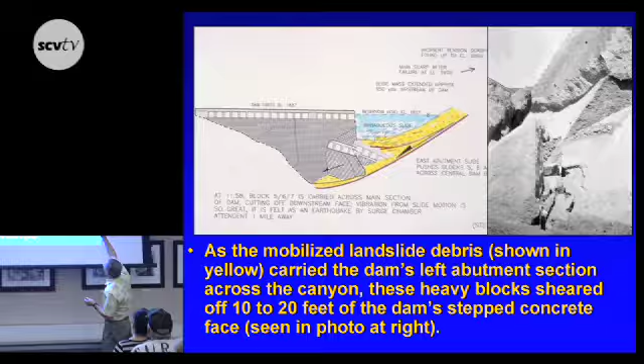So that is followed by block 7, which is the leftmost block, top of the left abutment. It slides down behind block 5, and you can see how it cleaves off the downstream face of the dam to a depth of about 18 or 20 feet, coming across and chopping those blocks off. That's a huge force in terms of the shear force.

At the end of it all, block 5 sitting there, 35 feet above the channel, has all the schist detritus sitting over it. There's no way the thing fails on the right abutment in the conglomerate and puts a bunch of schist up on top of this block 40 feet higher over there. This doesn't work that way. All these rocks are dumb, they obey gravity, and they're just going to go where gravity takes them.

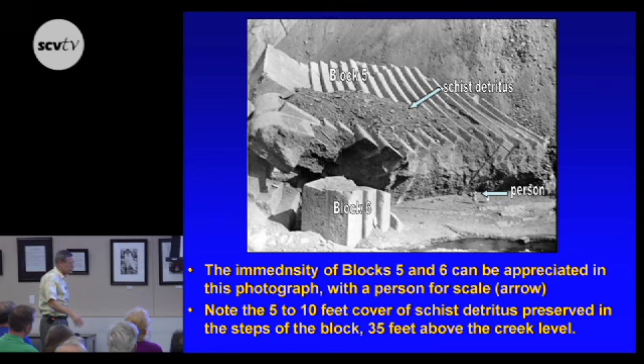You can see a person there for scale. And that schist is still sitting in there, big blocks, real angular. They haven't been tumbled in water for any distance, they're just right out of the slide. There again, showing the schist detritus caught on the steps. This block 6 is a little piece of 5 that fell out a couple afterwards. Again, people there for scale.

The base of block 1, which is cleaved off. That's a spillway, isn't it? Well, the whole downstream face is a spillway. Right, but I mean the rounded part. Oh yeah, that's a spillway slit. Yes, that's correct, he's talking about right here. That's one of the spillway slits there and right here. And then that's the solid section where they had the outlet works. And there's other slits over. Actually, that's the end of the spillway slits in block 5, the last 2 on the left side.

So here's something really interesting. If you look at where the cleaving occurred, it goes down and then comes up. But then block 5, which did the cleavage, dropped down about 35 feet. That block originally was way up there, and when it broke on the right abutment, later in the failure stage, it sluiced out a bunch of material and this thing slid down to its final resting place. So that's the gap, you have to put the pieces back to where it was. Again, the governor's commission didn't catch any of this.

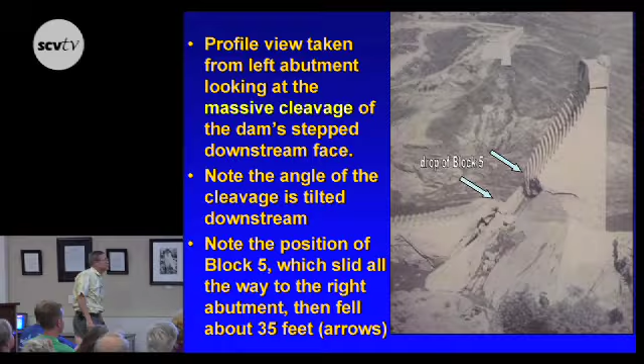This is details. So if we look at block 7, that's the uppermost left abutment block, it slides in behind block 5. What happened is block 5 was higher. It cleaved off, came down, came up on the right abutment, and then fails back down against block 7, which has it wedged in there real nice. So here's what's going on: block 5 flows down on the landslide, comes around, comes up because of the opposing valley wall, and then when that fails later, where the small blue arrows are, it falls back down.

Meanwhile, the landslide dam's being excavated in about 5 minutes. So 700,000 cubic yards of schist rock is getting blown out of there in a 5-minute period, creating a very turbid outflow that carries these big blocks downstream, and it's carving out a big hole underneath the dam.

After the failure was over, they actually surveyed block 1 because they had a theodolite station and benchmarks in the dam, including a benchmark in block 1. They determined very precisely that there was clockwise rotation of 0.7 feet, or 8.4 inches, which attests to the big hole that was dug on that side of it. That's an enormous block to move that much, by the way.

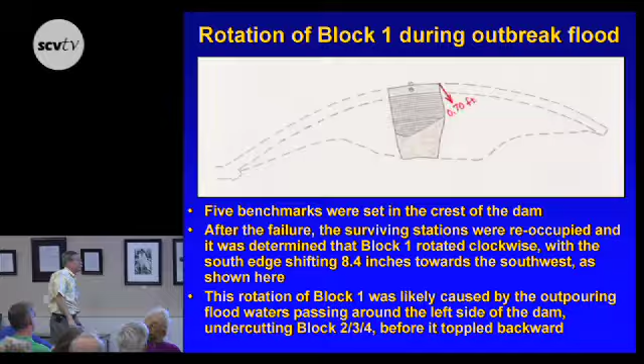So here's what I think happened: the lake drained rapidly, took out the slide debris, and that took 5 minutes. After that, it started eating out the base underneath the main section of the dam, to a depth of about 40 feet. That's a big hole. The combined flood wave at this point, when the right side goes out with the left side at that water level, is about 1.7 million CFS, cubic feet per second.

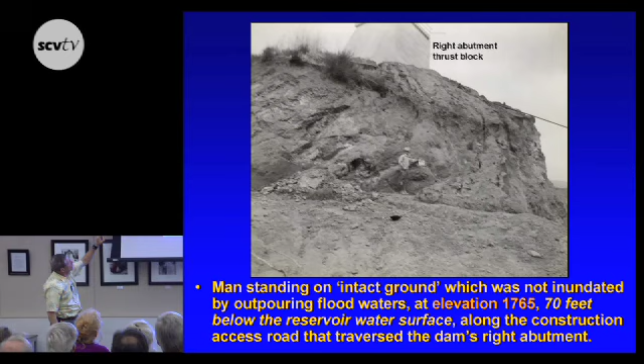We can actually see on the right abutment, where it supposedly happened first, this guy is standing on the high water mark. Now look up above him, that's the right abutment thrust block. The water was within 20 inches of the top of that block, that's where the water level was when they started. You can see the water has dropped down almost 70 feet to get to where this guy was. So that lake had drained down almost 70 feet before the right side broke.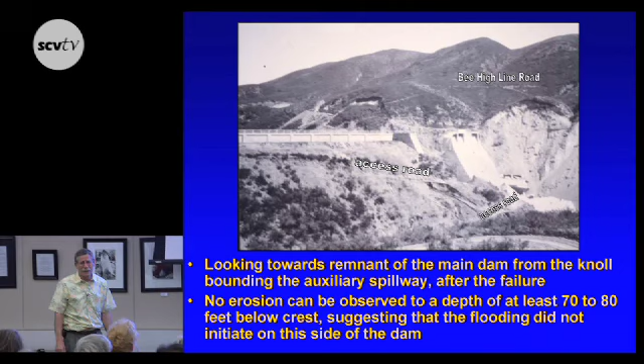So that is a big drop in water before the right abutment even goes. So what happened with the Governor's Commission? They're not forensic engineers, they're designers. And they're all very important men. They don't have a lot of time. They wanted to get this thing done. They got it done, but they didn't do a very thorough job.

Because that's all evidence you could see with the naked eye. So if we look here, every picture we look at, you can see the erosion begins way below the access road, which is about 70 feet down, 75 feet down in that particular picture.

That's about two-thirds of the lake being drained by the time the right abutment side fails. At the very end of the failure sequence, when there's only about 16 feet of water in the lake, the left half of the main dam topples backward at an angle of 54 degrees, and you get blocks 2, 3, and 4. That's because of the big hole excavated underneath it where the landslide dam came out.

And that's what it looked like the morning after when they got out there and got to see it in the first sunlight, first daylight. That's what it looked like.

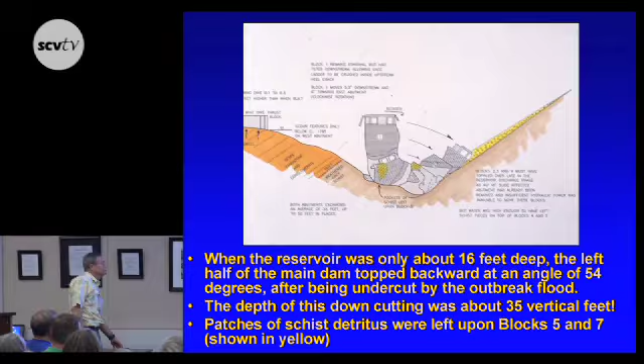This is the picture that Charles Outland looked at, and he saw the cleave marks, chatter marks on the downstream face, and he said blocks 5, 6, 7 had to be carried across in the landslide, and it chattered away and came around. He had it all right. It's exactly right. Pretty good job of forensics.

Okay, now we get behind those toppled blocks. Look what we see - horizontal lines. What are those? Well, those are pieces of silt. This thing fell backward into the sediment that's in the reservoir, and you got about 16 feet of water. It's real turbid, and so that turbidity is recorded on those blocks.

And the lift heights right here - you see those lines right there? Those are 5 feet apart. They're 5-foot forms, so using those, I can easily get this height is 16 feet right there. So it's very, very late in the failure sequence that this enormous series of blocks breaks over and topples, and it's just uncanny that this thing just cleaves off like this.

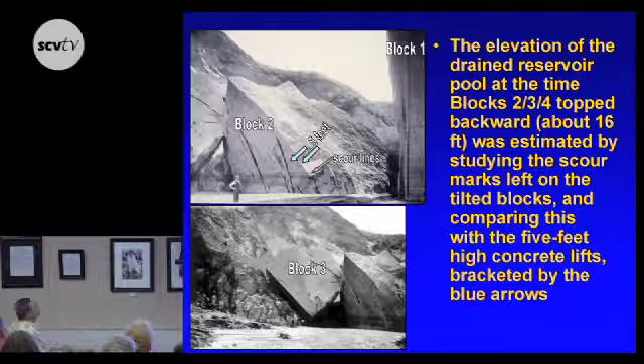Well, the reason this cleaves off is because of those pillows I showed you earlier that are real low strength, and they're undulating, and don't have any tensile strength, because the laitance layer is like a layer of grease sitting there. They should have jetted that off. So the blocks break in tension when it falls over, and they're very big and angular and nasty looking. As you can see them there, they're huge blocks - it's half the dam, half the main dam, basically.

So that's the final configuration. You can see the power lines, you can see the high water line. The story it tells is a left abutment failure first.

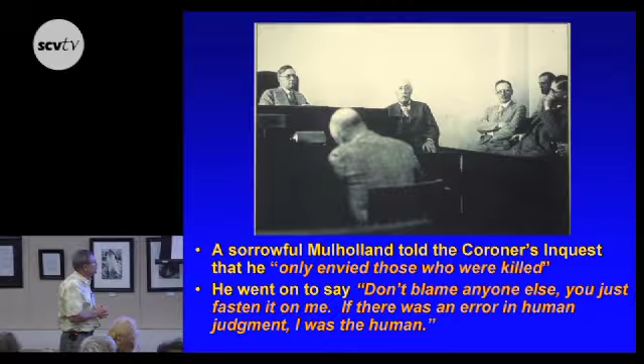Mulholland gets tried in a coroner's inquest, and Asa Keyes - he wants to become governor, and he wants to take Mulholland on and sue him or charge him with negligence for the deaths of all these people. And Mulholland gets up on the stand and says, you know, he only envies those that were killed. Don't blame anyone else, just fasten it on me. There was an error in human judgment. I was the human. And that turns out to be right.

And that was a pretty... Now, if we look at the coroner's inquest, I was very impressed at the questions they asked. I was more impressed by the report they wrote afterwards. These men were not paid a nickel. None of them had any tie to the Department of Water and Power. They were eminent engineers - three of them were very eminent structural engineers. One was a mining engineer.

They were learned men. They write down: a sound policy of public safety and business and engineering judgment demands that the construction and operation of a great dam should never be left to the sole judgment of one man, no matter how eminent, without check by independent expert authority. For no one is free from error, and checking by independent experts will eliminate the effect of human error and ensure safety. That has been quoted across America thousands of times since. And some men in Los Angeles, when it was a tiny place compared to what it is today, wrote that.

There's an incredible amount of wisdom in that statement. That's exactly right. Okay, so who actually designed the dam?

It was laid out by the Bureau of Waterworks and Supply Office Engineer Edgar A. Bayley, somebody I've studied in great detail. I even have his book collection, which I got lucky to find in a used bookstore one day on Wilshire. My wife didn't think it was lucky because we missed a couple house payments. Everybody has their weaknesses. Mine's not prostitutes, it's books.

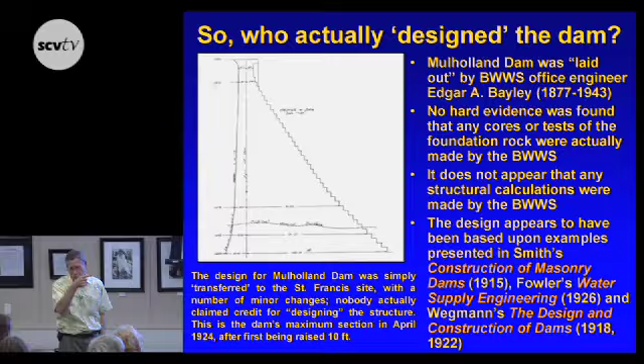It's the same thing every time. There weren't any cores. Now, the cores may have been destroyed. He said they were stored out there and they were lost in the flood. I might give him that. But I know Mulholland, and I know if he had tested them, the records would have been there, because everything else that they did was there. The records were there. They were never produced.

The design appears to have been based on examples in three books: Smith's Construction of Masonry Dams, Fowler's Water Supply Engineering, and Wegmann's Design and Construction of Dams, all of which get mentioned in the coroner's inquest. I have copies of all those books. I looked at them, and nobody claimed credit for designing the structure.

When Bayley is put on the stand, and this is the acid test in the whole 818 pages, they say, Mr. Bayley, did you do the design? Did you design the St. Francis Dam? And he goes, I did not design the St. Francis Dam. Pretty definite. But everybody else says that he did.

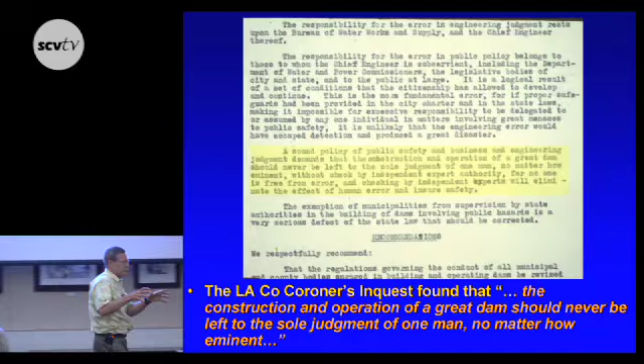What he did is, he said, I laid it out according to Mr. Mulholland's direction. I laid it out. That means he took the design for Weid Canyon, Mulholland Dam, and he made it fit the site in San Francisquito Canyon. And the only calculations they did was to figure out how much concrete they were going to need. That was it. There were no stability calculations done.

But they were following those designs in those books, which were industry standards. That's what a lot of people did. That's how engineering was done in the 1920s. And that's why the Governor's Board of Inquiry and the other boards of inquiry didn't fault him, because they knew that. But yeah, it was pretty much the way other people did things, if you believe their cross-section.

That's the drawing on their original application, April 16, 1924. It did not get built that way. That backward batter's not there, and those steps don't go down all the way. But that's where they got the drawing that they gave to the Governor's Commission. It's not in line with what all the construction photos show.

Okay, fixing blame. The coroner's inquest comes out. They blame the dam disaster on the foundation, and Mulholland took the blame for the mistakes. That's the end of Asa Keyes' political career. He ends up going to San Quentin and spending the rest of his career there. He dies before Mulholland does. He's half his age.

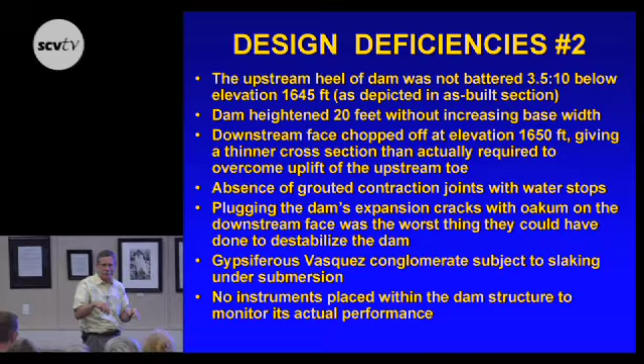I had pictures of that. You missed seeing them because I had the wrong lecture up here. I apologize for that. That occurred on the Facebook page this year. A picture of the grouting operation, little grout pipes, taken in January 1928. I went, wow, do I like Facebook? I might miss a lot of things, but I don't miss any of those postings.

Gypsiferous Vasquez conglomerate was subject to slaking under submersion - not great stuff to build a dam on. If you build a dam on something like that, you have to have a lot of grouting and a lot of drains.

No instruments were placed in the dam structure to monitor actual performance. By the way, Baldwin Hills was the most instrumented off-stream reservoir in the country when it was put in.

Instrumentation's never going to save a flawed design. You have to do something with the instrumentation, and you have to have authority to do something about it when you read the instruments.

Conclusion number 1. I want to give you a quote from Mencken: for every complex problem, there is a solution that is simple, neat, and wrong. That's me on St. Francis Dam.

I was wrong for a long time, and I'm just here to tell you - that's the message I'm going to tell you. I looked at a lot of different things, but I looked at them in a vacuum instead of looking at them from a systems engineering point of view, which is you've got to look at everything, not just your own specialty. You've got to look at everything. And it's the combination of all those things that come together in a deadly way that creates catastrophic failures.

A calculated factor of safety less than 1 does not in itself mean the structure failed via that mechanism. I did that on Teton Dam for my PhD, and we got a factor of safety less than 1, and we said it's hydraulic fracturing - that's what made the dam fail. We published lots of papers and all this. And I look back on that now and I just go, wow, dumb kids. We didn't analyze other failure modes because that first one was so terrible, we just assumed that's how it failed.

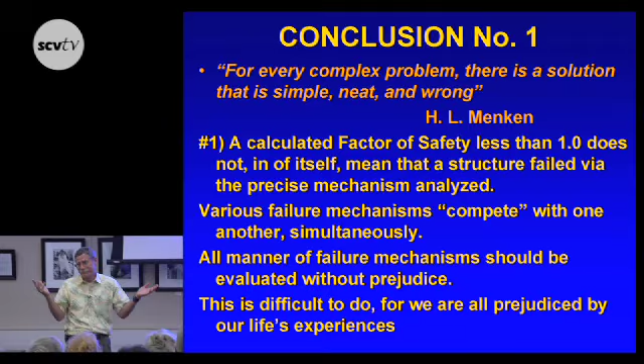I don't know that any dam failure I've ever worked on was just one single thing. I don't believe that anymore. It's more complicated than that generally. You have to have redundant systems that are robust to overcome having one thing break. It's like designing an airplane to go through combat - if there's one place you can put one bullet in that brings the plane down, that's not very robust. It has to be able to have some major system failure and not come out of the air, because the consequences are so grave. Various failure mechanisms compete with one another simultaneously.

That's what was going on here. We had the landslide, we had the pore pressure in the internal cracks of the dam. We had all these things going on simultaneously.

All manner of failure mechanisms should be evaluated without prejudice, and that's difficult to do, for we're all prejudiced by our life experiences. I never saw the huge landslide on the left abutment until I read Bailey Willis's article, the June 28, 1928 issue of Western Construction News, a trade journal. And when I looked at it, I said, how could I go out there so many years with so many credentials and miss this? I missed it because I wasn't looking for it. That's why I missed it.

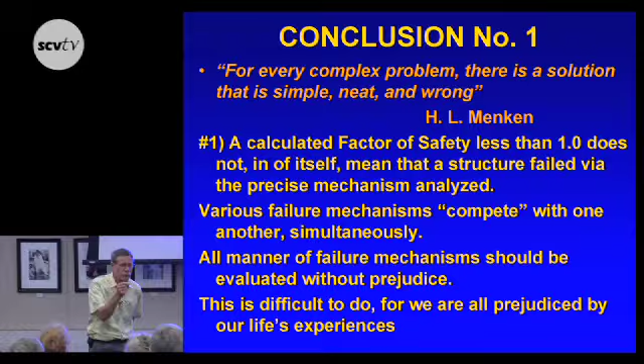You're going to miss anything you're not looking for and that you haven't been exposed to previously in your professional career or professional training. That's why the inclusion of a geologist on something doesn't insulate you from geologic disaster, because you're going to be limited to that geologist's experiences, and it might not cover all the things you need.

You'll see that next. So that's what I just told you. We're only going to see those features or structures that we're looking for, and we need to have in mind what we're seeking, realizing we're not going to see it if we don't have experience with it. I used to think there were these mega landslides coming out of Drinkwater Canyon.

That's in the Dibblee thing in 1997, coming down. And Professor Perry Ehlig told me, no, I don't think that's what's going on out there. He was the expert in the Pelona schist. So I wrote to him, and I called him, and I tried to get out there in San Francisquito Canyon, and we were always too busy, couldn't get it. Finally I got discouraged, and I sent him a $100 bill, and he called me.

Naked women, $100 bills, they both work.

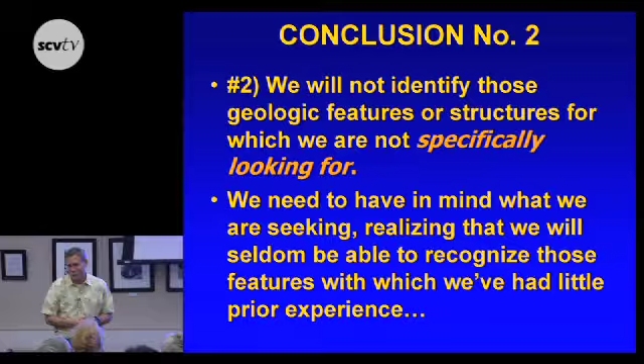Okay, so I got down here, I spent two days with him out in the field, and he talked me out of that whole scheme. I showed him a lot of things he didn't know about, but in the very end, that's an old erosional surface running off toward the San Fernando Valley before the Santa Susana thrust came up. It looks like the headscarp of a giant mega slide complex, but it's not. So I changed my mind on that one. I retracted. That slowed me down on writing the book.

We're almost done. Engineering geology is very subjective, and it all gets down to the geologist's experience. Consider the fact we now know there are 153 dams in the United States which were unknowingly built against ancient landslides.

Here's one place where I'm gonna toot my own horn. Because of my work on St. Francis Dam getting national attention and an award from the National Research Council, the Corps of Engineers and the Bureau of Reclamation hired the U.S. Geological Survey to look at all the dams in the United States and see if any other dams were similarly built against paleo bedrock landslides. I didn't get any of that work, but a bunch of other people did, and they found 153 dams.

I'm more proud of that than any other contribution I've made to my profession, because that wouldn't have happened if I hadn't written about St. Francis Dam. That was a $2.9 million study that I missed out on.

Okay, last slide. Bill Mulholland had weak points in his character, like any of us. I think his biggest one was his thirst for thriftiness, because I had a lot of clients like him. But that was the same thriftiness that allowed him to build a municipal infrastructure for Los Angeles at rock bottom prices. No question. You compare LA to San Francisco, you get your water for about one tenth the price they got theirs with Hetch Hetchy, okay?

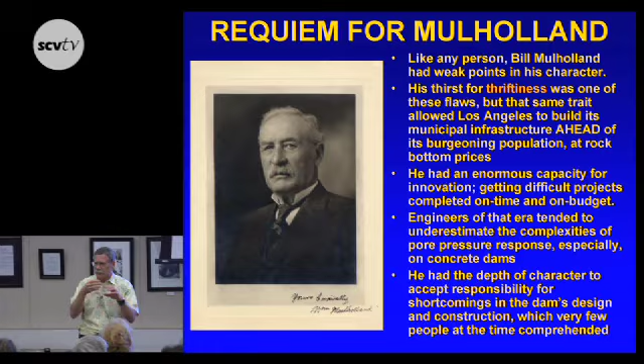Mulholland went in there, assessed the operation, and he said, okay, go get me a bunch of 2-inch diameter pipe and bring it here. And they brought all this pipe in, and they went up to the crown of the tunnel, and they screwed on a cap, scratched 'unscrew cap' on it, and they started pounding this thing through the cave-in, all 300 feet on a slight decline.

When they got to the other end, they could tell there was less resistance, these guys pounded on it from the other end, so they knew they got through. They opened it up, they could talk to them. Then they said, get your canteens out, we're gonna pour water to you. And they started pouring water. Then he got a bunch of hard-boiled eggs, and he started shooting hard-boiled eggs to them to feed them. And then he started pumping air to them, and they saved all of them.

They don't teach you that kind of stuff in college. You got to think on your feet to do something like that. The man was pretty brilliant when it came to solving problems, and he appreciated geology much more than most of his colleagues of his era.

He was the first civil engineer to recognize the threat the San Andreas Fault posed to the municipal infrastructure of Los Angeles. He was way ahead of his time on that one.

He had the depth of character to accept responsibility for the shortcomings in the dam's design. He didn't know why it failed. He was surprised, he was befuddled by it. Heck, he had copied these designs in Wegmann and Turneaure, all these famous books. Why didn't it work?

Very few people at the time really comprehended. They didn't want to really know why it failed. They wanted to get it swept under the rug and get on with the Boulder Canyon project. And that was asserted in 1978 during the 50th anniversary when they went and talked to Charles Outland.

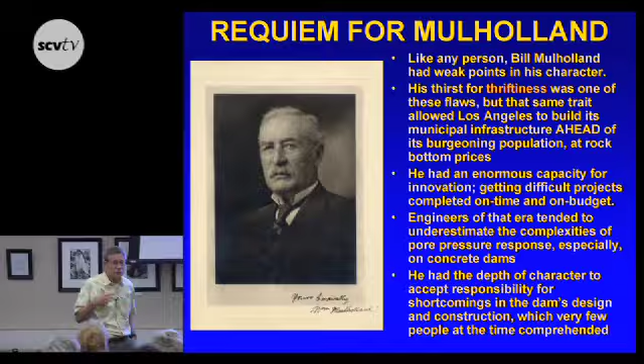Years later, I get on the Hoover Dam board. I start studying Hoover Dam. I've written all kinds of stuff about it. He was right on target once again. Charles Outland, what a man.

Don't honor me, honor him. He did a great job as an amateur historian. Did a great job. All right, that's all I have. Thanks.